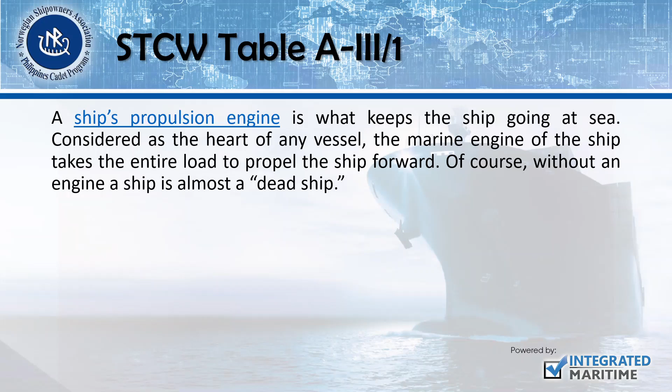So it is important that we protect our engine since it is considered as the heart of the vessel. So like humans as we are, we try to protect our heart. So we try to detect early warnings if we have heart problems for us to avoid incidents from happening. So it's the same thing with our engine. So our engine is fitted with safety devices in order to be protected, in order to avoid serious damage to the whole machinery.

So the different types of protection on a ship's main engine. Basically, there are four main types of protection to safeguard the propulsion engine. Number one is alarm. So in case of deviation of engine parameters from the set value, an audible, something that you could hear, and a visual alarm, or you could see, will sound, which will give an early warning to the problem. So, early warning, it means that the problem is not yet big, and yet there is already a deviation from the set value.

It means that the system is not working as expected because the value of the fluid or the value of the temperature and pressure in the engine is not as what it is expected from the set value. It is below the minimum or above the maximum, which is set by the maker. So the alarm would serve as an early warning.

And thus, when there is an alarm, as marine engineers, you have to look at it. You have to look at the problem, whether or not this problem may escalate or needs immediate response or immediate action.

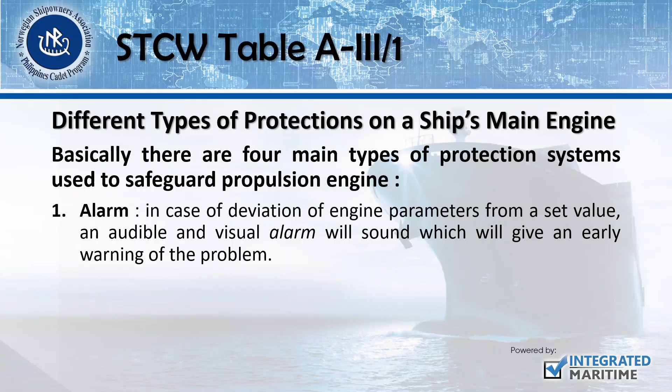So the next stage of protection is the slowdown. So the engine would go into slowdown when the actions taken to address the alarm are not sufficient to fix the problem. So this would counter the disturbed parameters. This would normalize or neutralize them so that they will not cause an additional problem to the whole system. So it would slow down.

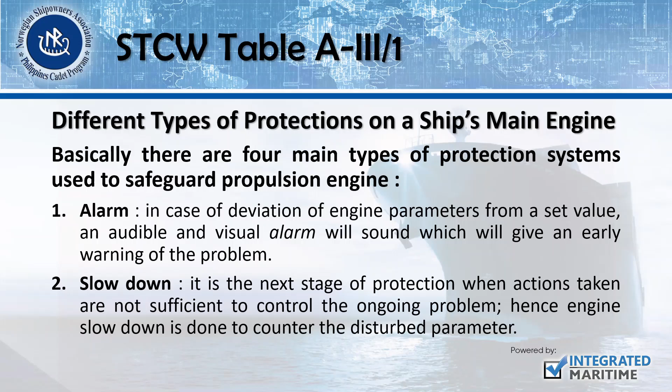Let's say, for example, you are running at full speed. In case of a problem which was not addressed, when the automatic slowdown is activated, you would go from full ahead to dead slow ahead. So this serves as protection in order for further damage not to occur.

Next is the engine shutdown. So when there is a higher fluctuation, it is already alarming, in the engine parameters, which can harm other systems. Meaning, the harm of this fluctuation will not only affect one system, but the whole system of the engine. The shutdown protective device will cut off the fuel supply immediately, and the engine will stop.

So the shutdown device serves as the protection which does not allow the engine to run even further, or it really stops the whole operation of the main engine system in order to protect it from damage.

And the last is the starting interlock. So this will not allow the engine to start from the standstill condition if some parts of the system within the engine have not been operated or arranged properly.

So if the engine is not ready for starting, the starting interlock is still activated, meaning there is still part of that system which has not yet been adjusted to what it should be. Let's say, for example, the starting air. So when you forget to open the starting air valve, the starting interlock will still be activated, and thus you will not be able to start the engine. So before you start the engine, you have to ensure that all starting interlocks have been addressed or removed. This starting interlock does not only serve as safety for premature starting, but it also serves as a safety in case of maintenance work being done on our vessel or engine.

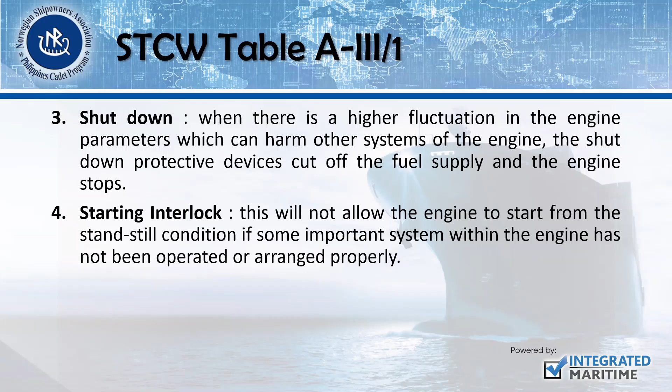The main engine itself is protected from accidental starting when you are working within the engine or around the engine parameters. Even sometimes when someone is working on the propeller or doing hull inspection, this starting interlock is also ensured so that the vessel will not accidentally move, or the propeller will not accidentally turn. This is to prevent accidents and to prevent harm not only to the machinery but also to the people working in the engine.

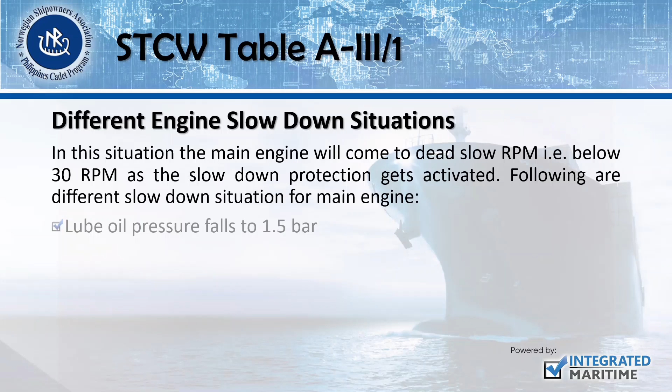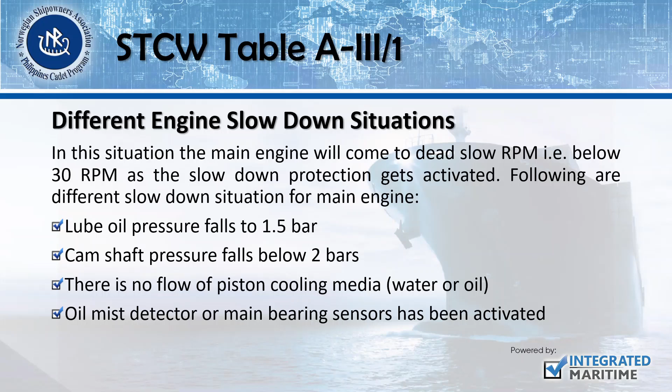So in a slowdown situation, the engine will come to dead slow at an RPM below 30, as the slowdown protection gets activated. These are just examples: oil pressure, camshaft pressure, no flow of piston cooling media, oil mist detector, or main bearing sensors activated. These are just examples of slowdown situations, and the values here would vary from one vessel to the other. It doesn't mean that I've placed here 1.5 as a fixed value. So just a quick disclaimer, it does not mean that on your vessel later on it would also be 1.5. It depends really on the maker, on the set value of the engine.

And the different shutdown operations - so it's either lower than the slowdown point or higher than the slowdown shut point, depending still on the maker or the value that was set by the maker.

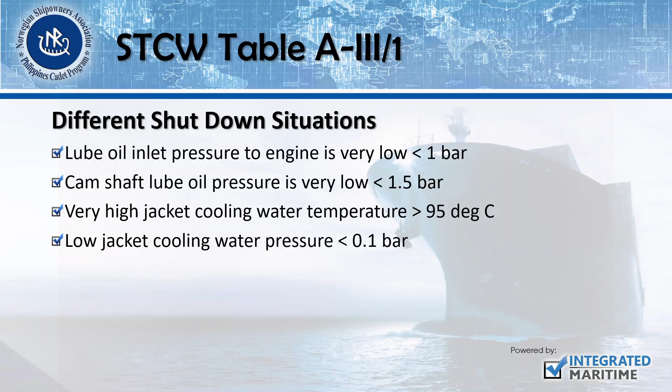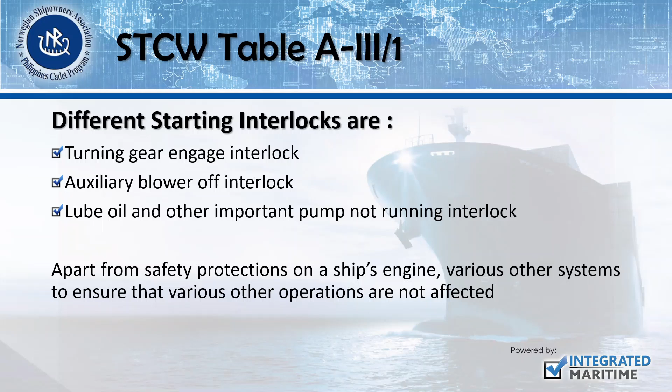And the different starting interlocks: turning gear interlock, auxiliary blower off interlock, lube oil, and other important pump not running interlock. So apart from safety protection on ship's engine, various other systems also have to ensure that various other operations are not affected. These safety devices now ensure that a damage in one system would not affect the other system, which is why it is very important, later on as marine engineers, as I said, you have to ensure that these safety devices are working properly, and in order for them to serve their purpose.

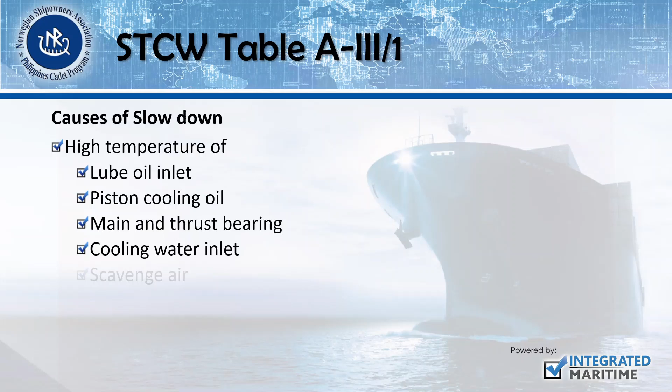So to sum it all up, these main engine safety devices are fitted in order for us to protect the engine from greater damage, like how we protect our heart - how we should protect also our engine in order for it to continue running, in order for the vessel to continue its operation. Once the engine is damaged, the whole operation would be affected, which is why these safety devices were ensured. And in your end, as marine engineers, you have to constantly test the safety devices to ensure they are doing their purpose, or that they would be effective means of protecting our engine.